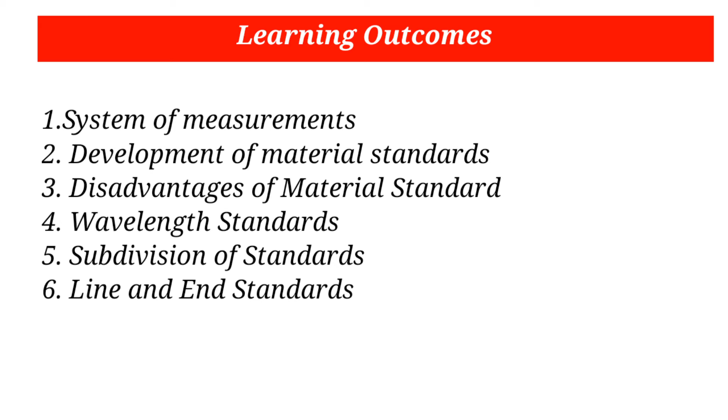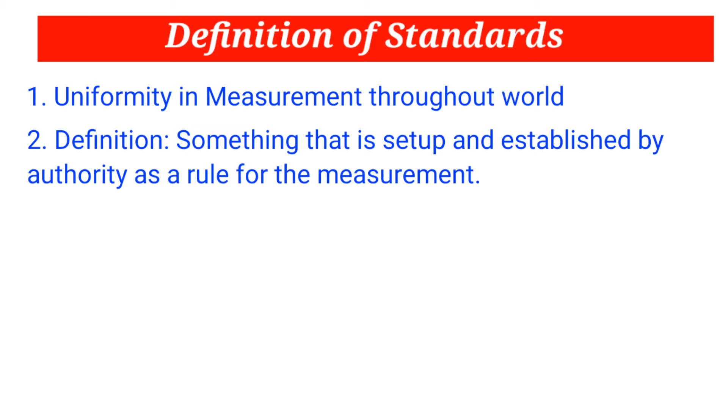In engineering metrology, for every kind of quantity to be measured, there must be a unit to express the result of measurement and a standard to permit making the measurements by maintaining the uniformity throughout the world. A standard is defined as something that is set up and established by authority as a rule for the measurement of a quantity, weight, extent, value, or quality, etc.

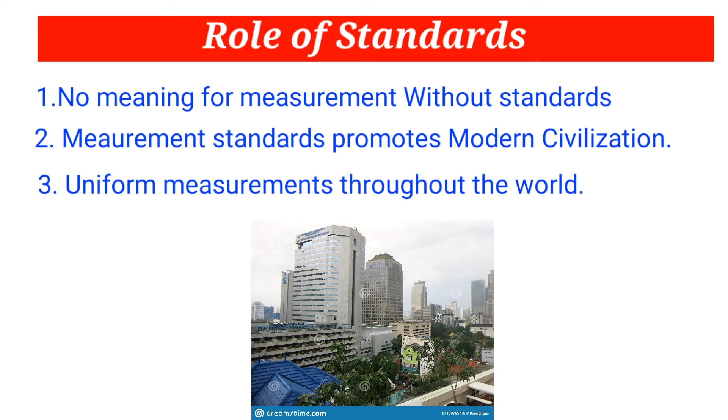Any system of measurement must be related to a known standard, otherwise, the measurement has no meaning. Industry, commerce, international trade, and in fact, modern civilization itself would be impossible without a good system of standards. The role of standards is to support the system which makes uniform measurement throughout the world and helps to maintain the interchangeability in mass production.

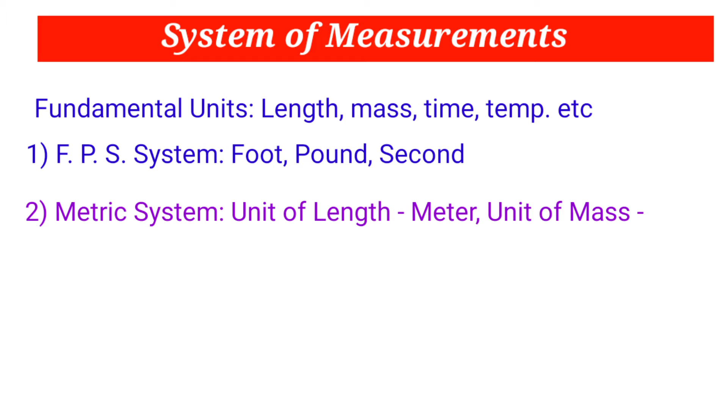A measuring system is based on a few fundamental units like length, mass, time, temperature, etc. All the physical quantities can be expressed in terms of these fundamental units. The following systems of measurement are in use in different countries. First is the FPS system. This system, being inconvenient, is steadily losing its popularity. Second is the metric system. The metric system is the predominant system in the world due to its simplicity for calculation purposes compared to the FPS system.

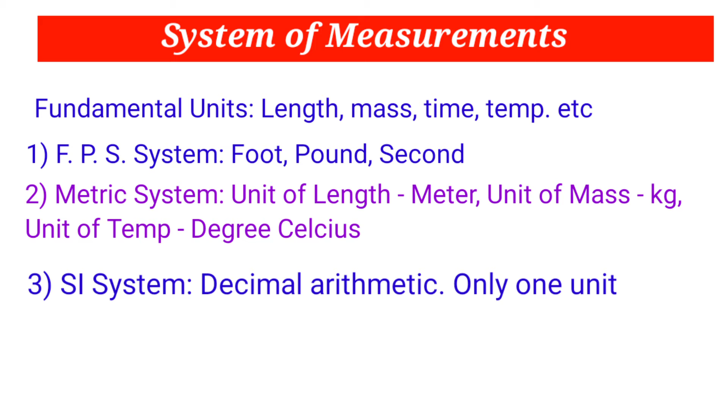It is a decimal system of weights and measures. It is based on the meter as the unit of length, the kilogram as the unit of mass, and the unit of temperature is the degree Celsius. Third is the SI system. This system is an extension and a refinement of the metric system. It is more convenient and superior to other systems. The SI system, like the traditional metric system, is based on decimal arithmetic. It provides only one basic unit for each physical quantity. It is comprehensive because its 7 basic units cover all disciplines.

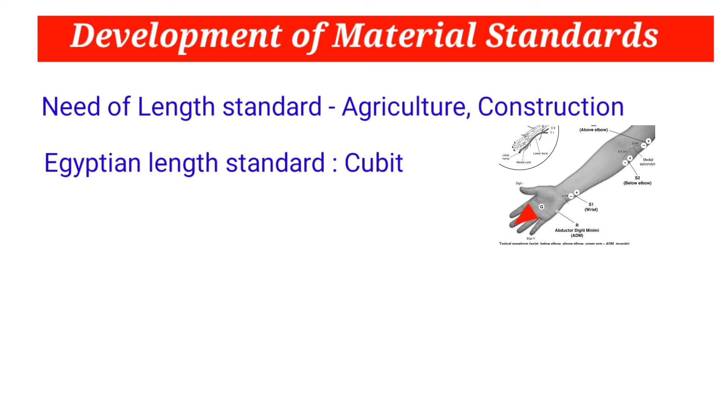The need for establishing standards of length was raised primarily for determining agricultural land areas and for erection of buildings and monuments. The earliest standards of length were established in terms of parts of the human body. The Egyptian unit was called a cubit. It was equal to the length of a forearm, that is from the elbow to the tip of the middle finger.

Rapid advancements made in engineering during the 19th century were due to improved materials available and more accurate measuring techniques developed. It was not until 1855 that the first accurate standard was made in England. It was known as the Imperial Standard Yard. This was followed by international prototype meters made in France in the year 1872. These two standards of length were made of material and hence they are called material standards, in contrast to the wavelength standard adopted as a length standard later on.

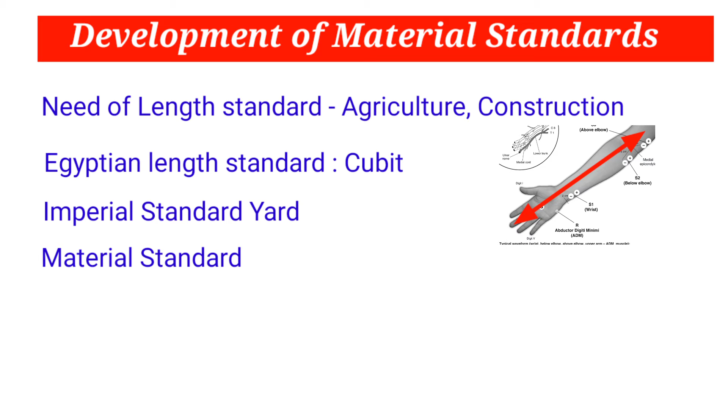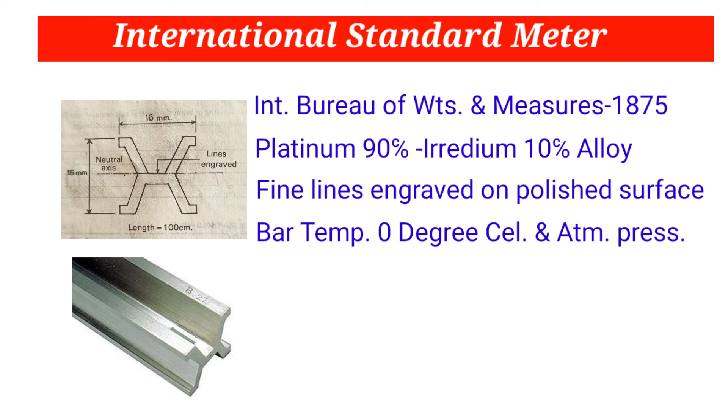This standard was established originally by the International Bureau of Weights and Measures in the year 1875. The prototype meter is made of 90% platinum and 10% iridium alloy, having a cross section as shown in the figure. The upper surface of the web is highly polished and has two fine lines engraved over it. It is inoxidizable and has the good finish required for ruling good quality lines. The bar is kept at 0 degrees Celsius and under normal atmospheric pressure. It is supported by two rollers of at least 1 centimeter diameter symmetrically situated in the same horizontal plane.

The distance between the rollers is kept 589 millimeters so as to give the minimum deflection. The web section chosen gives maximum rigidity and economy of the costly material. The distance between the center portions of two lines engraved on the polished surface of this bar of platinum iridium alloy is taken as 1 meter. According to this standard, the length of the meter is defined as the straight line distance at 0 degrees Celsius between the center portions of a pure platinum iridium alloy bar of 102 centimeter total length and having a web cross section as shown in the figure.

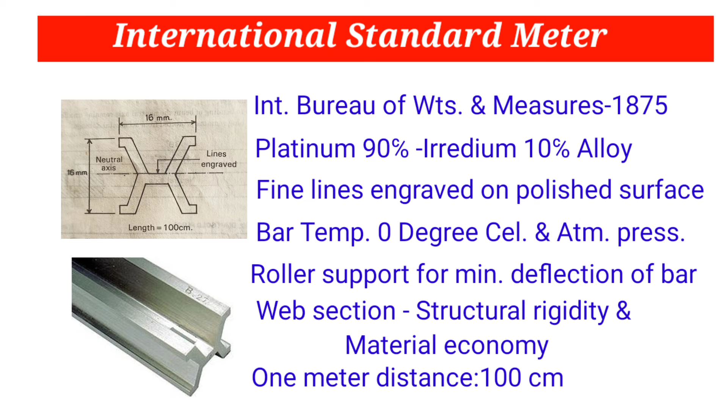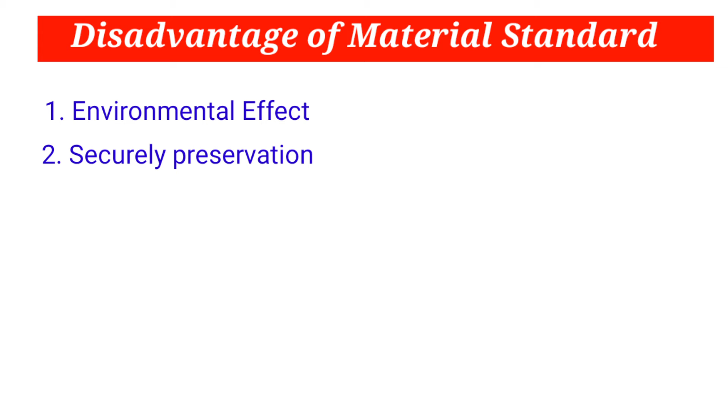The material standards are influenced by the effects of variation of environmental conditions like temperature, pressure, humidity and aging, and thus change in length. These standards are required to be preserved or stored under security to prevent their damage or destruction. Replicas of these standards were not available for use elsewhere. These are not easily reproducible. A conversion factor was to be used for changing over to metric working. Considerable difficulty is experienced while comparing and verifying the sizes of gauges.

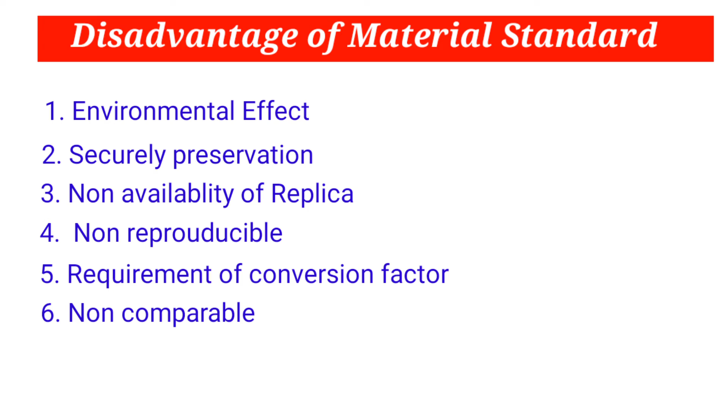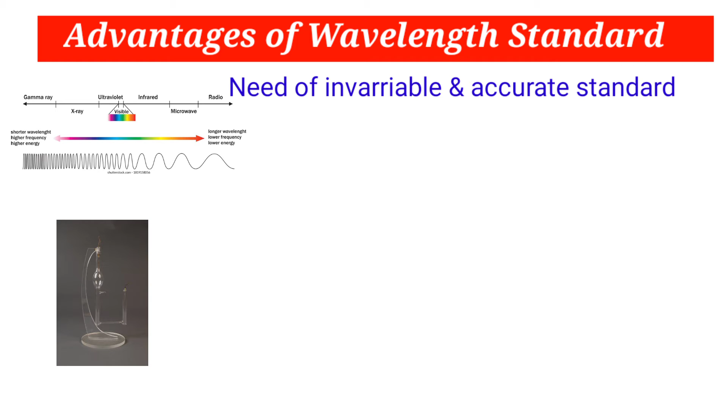The disadvantages of material standards may lead to errors of an unacceptable order of magnitude. It therefore becomes necessary to have a standard of length which will be accurate and invariable. Jacques Babinet, a French philosopher, suggested that the wavelength of monochromatic light be used as a natural and invariable unit of length. The Seventh General Conference of Weights and Measures approved in 1927 the definition of a standard of length relative to the meter in terms of the wavelength of red cadmium as an alternative to the international prototype meter.

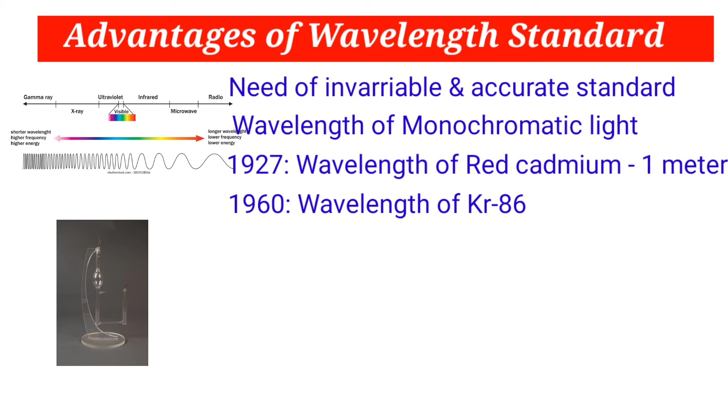Orange radiation of the isotope krypton 86 was chosen for a new definition of length in 1960 by the 11th General Conference of Weights and Measures. The committee decided to recommend that krypton 86 was the most suitable element, and that it should be used in a hot cathode discharge lamp maintained at a temperature of 63 degrees Kelvin. According to this standard, the meter was defined as equal to 1650763.73 wavelengths of the red orange radiation of krypton isotope 86 gas. The standard as now defined can be reproduced to an accuracy of about 1 part in 10 raised to 9.

The meter and yard were redefined in terms of the wavelength of orange krypton 86 radiation as: 1 meter is equal to 1,650,763.73 wavelengths, and 1 yard is equal to 0.9144 meter.

It is not a material standard and hence it is not influenced by effects of variation of environmental conditions like temperature, pressure, humidity and aging. It need not be preserved or stored under security and thus there is no fear of being destroyed as in case of a meter and yard. It is not subjected to destruction by wear and tear.

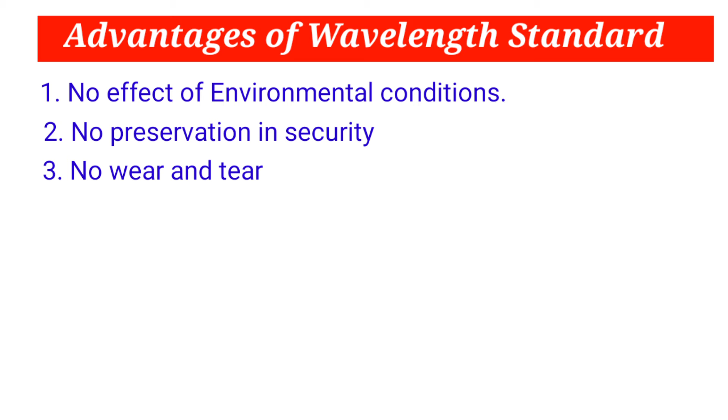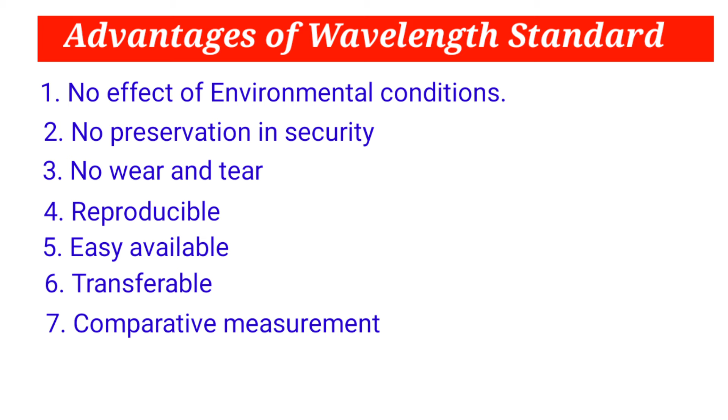It gives a unit of length which can be produced consistently at all times in all circumstances at all places. In other words, it is easily reproducible and thus identical standards are available with all. The standard is easily available to all standardizing laboratories and industries. There is no problem of transferring this standard to other standard meter and yard. It can be used for making comparative measurements of a very high accuracy.

The international standard yard and the meter cannot be used for general purpose. For practical measurement, there is a hierarchy of working standards. Thus, depending upon the importance of accuracy required for the work, the standards are subdivided into 4 grades. These are primary, secondary, tertiary, and working standards.

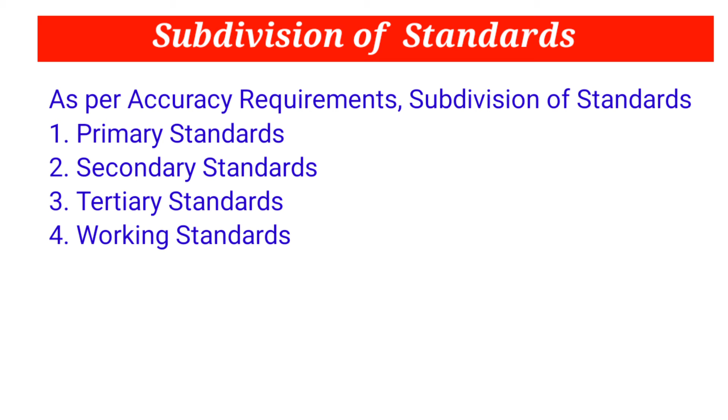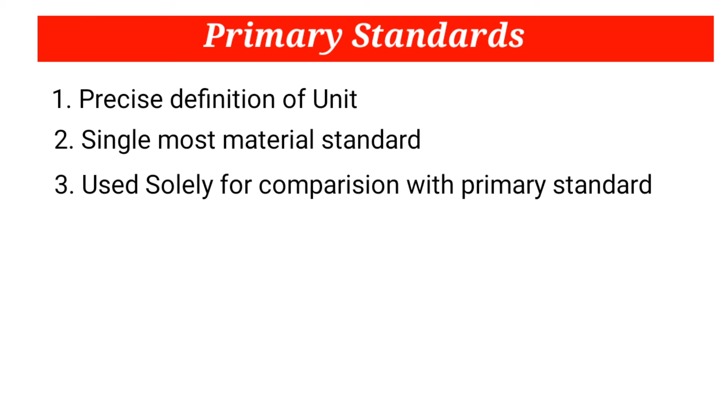For a precise definition of the unit, there shall be one and only one material standard which is to be preserved under the most careful conditions. It is called a primary standard. International yard and international meter are the examples of primary standards. Primary standard is used only at rare intervals, say after 10 to 20 years, solely for comparison with secondary standards. It has no direct application to measuring problems encountered in engineering.

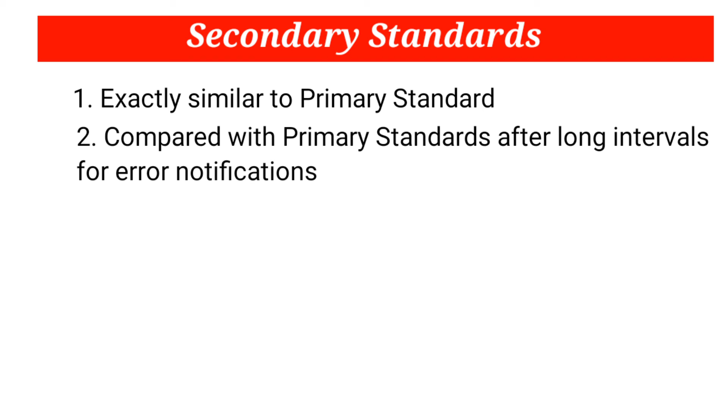Secondary standards are made as nearly as possible exactly similar to primary standards as regards design, material and length. They are compared with primary standards after long intervals and the records of deviations are noted. These standards are kept at a number of places for safe custody. They are used for occasional comparison with tertiary standards whenever required.

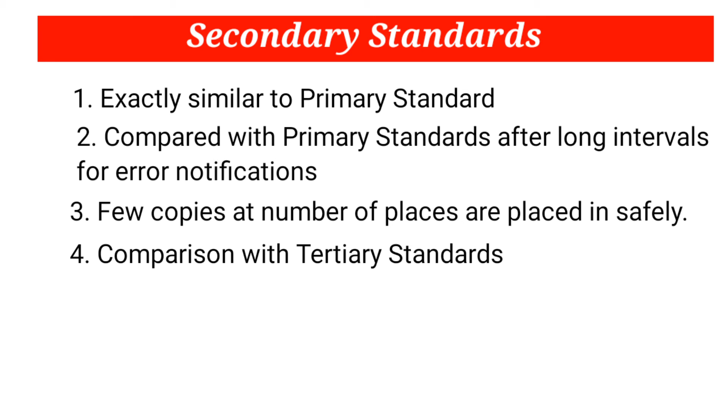Tertiary standards. The primary and secondary standards are applicable only as ultimate control. Tertiary standards are the first standards to be used for reference purposes in laboratories and workshops. They are made as a true copy of secondary standards. They are used for comparison at intervals with working standards.

Working standards. Working standards are used more frequently in laboratories and workshops. They are usually made of a low grade of material as compared with primary, secondary, and tertiary standards for the sake of economy.

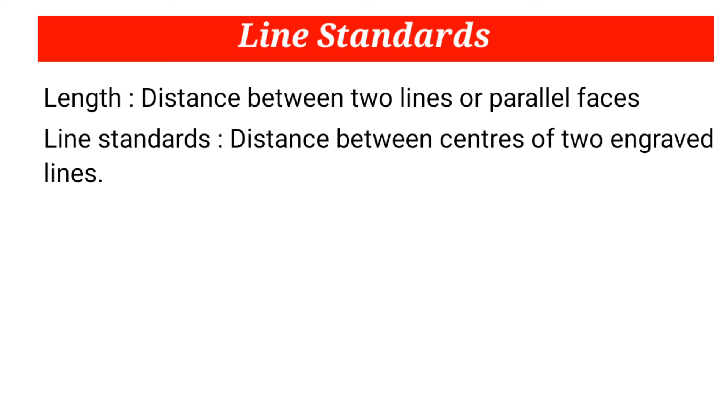A length may be measured as the distance between two lines or as the distance between two parallel faces. So the instruments for direct measurement of linear dimensions fall into two categories: one is line standards, two is end standards. Line standards. When the length is measured as the distance between centers of two engraved lines, it is called a line standard. Both material standards, yard and meter, are line standards. The most common example of a line measurement is the rule with divisions shown as lines marked on it.

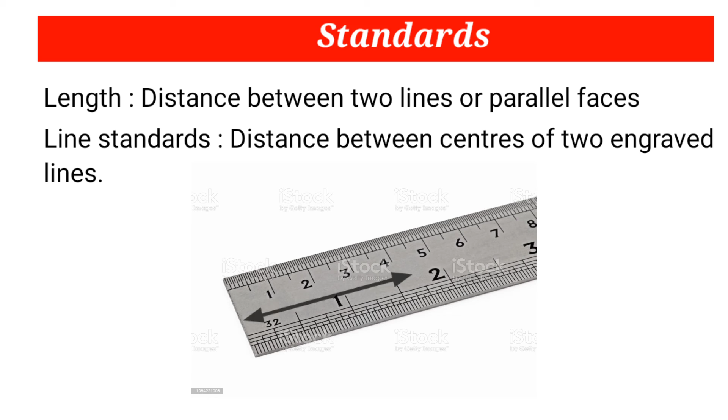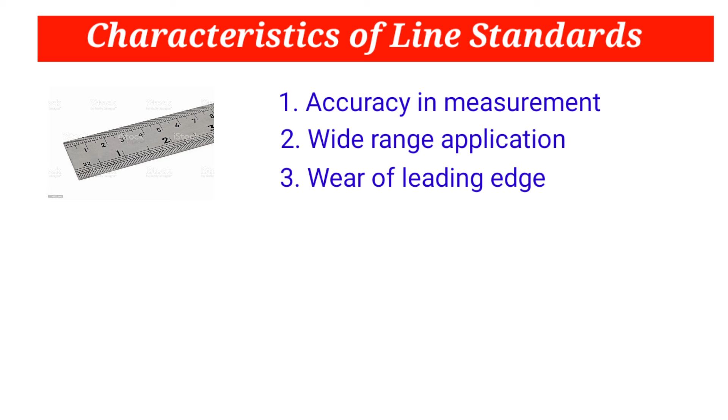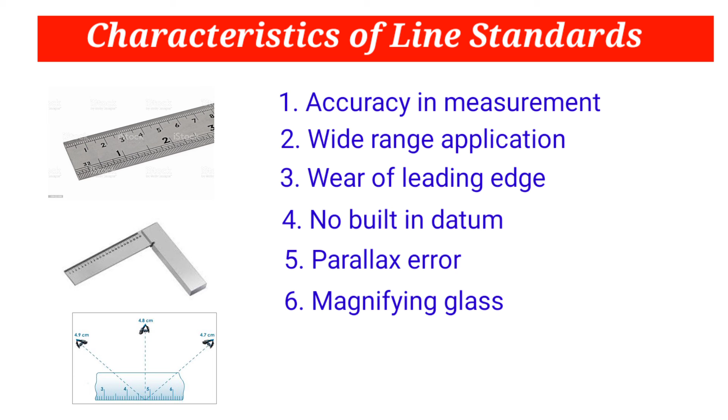The scales can be accurately engraved, but the engraved lines themselves possess thickness and it is not possible to take measurements with high accuracy. A scale is quick and easy to use over a wide range. The scale markings are not subjected to wear. However, the leading ends are subjected to wear and this may lead to undersize measurement. A scale does not possess a built-in datum. Therefore, it is not possible to align the scale with the axis of measurement. Scales are subjected to parallax errors. Also, the assistance of a magnifying glass or a microscope is required if sufficient accuracy is to be achieved.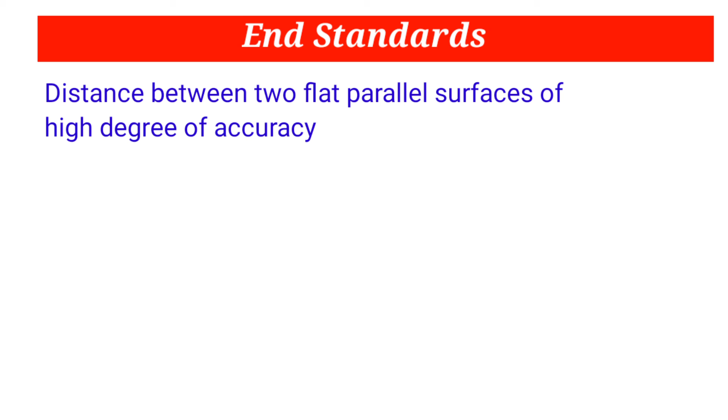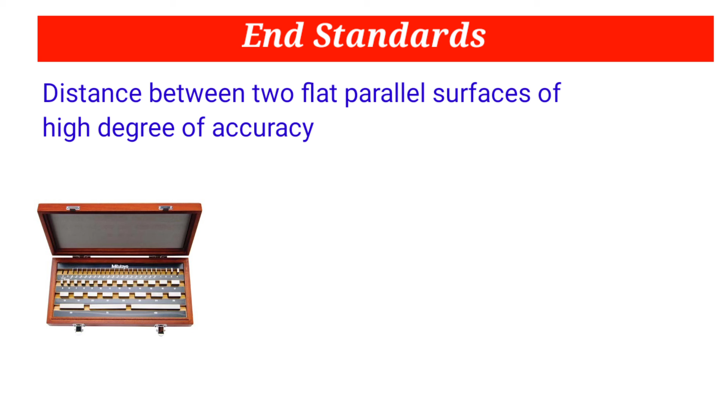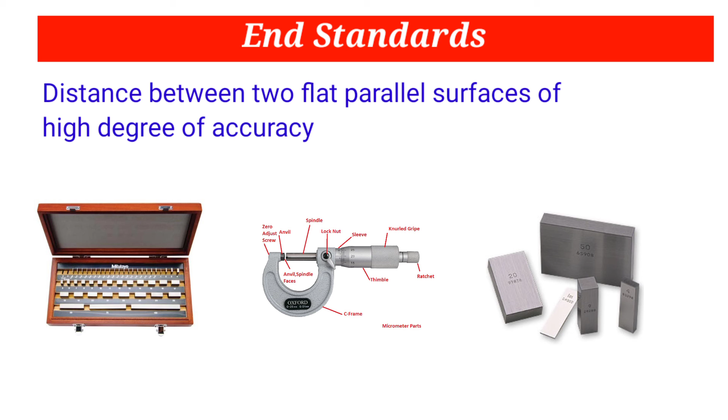When length is expressed as a distance between two flat parallel faces, it is known as an end standard. Examples: measurement by slip gauges, end bars, ends of micrometer anvils, vernier caliper, etc. The end faces are hardened, lapped flat, and parallel to a very high degree of accuracy. These standards are highly accurate and used for measurement of close tolerances in precision engineering as well as in standard laboratories, tool rooms, and inspection departments.

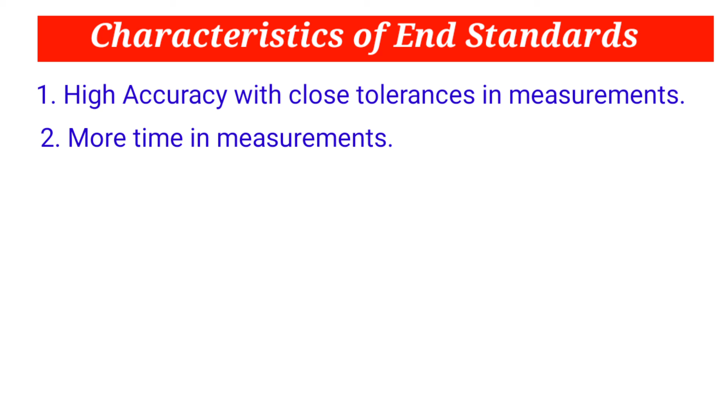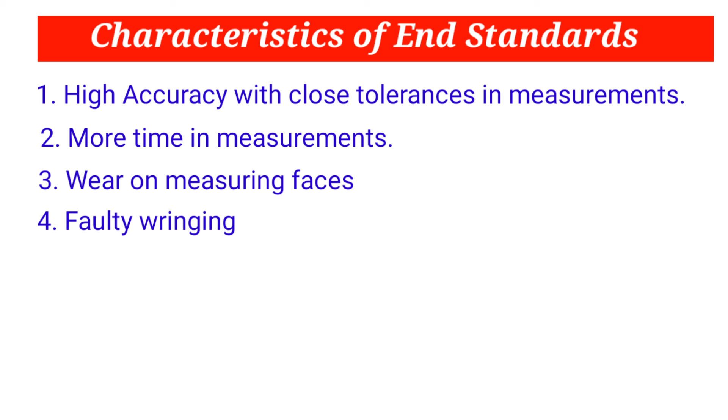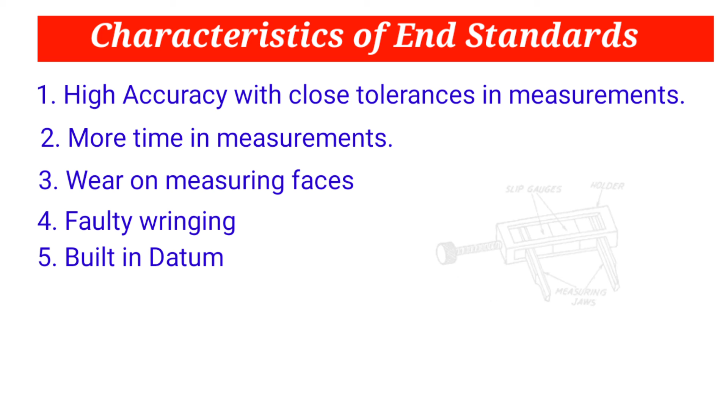They require more time for measurement and measure only one dimension at a time. They are subjected to wear on their measuring faces. A group of slips can be wrung together to build up a given size. Faulty wringing and careless use may lead to inaccurate results. End standards have a built-in datum since their measuring faces are flat and parallel and can be positively located on datum surfaces. They are not subjected to parallax effect as their use depends on feel.

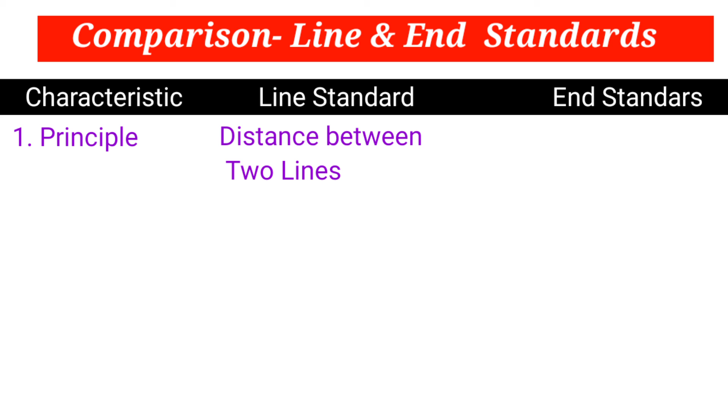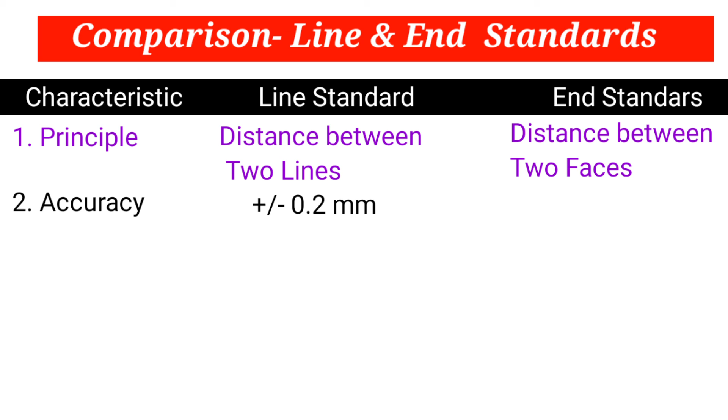In principle, in line standards length is expressed as the distance between two lines. In end standards, the length is expressed as the distance between two flat parallel faces. Accuracy of a line standard is limited to plus minus 0.2 millimeter for high accuracy. Scales have to be used in conjunction with a magnifying glass or a microscope. Accuracy in case of end standards, which are highly accurate for measurement of close tolerances up to plus minus 1 micron.

Effect of wear in line standards: scale markings are not subject to wear. However, significant wear may occur on leading ends. Thus, it may be difficult to assume zero of a scale as a datum. Effect of wear in end standards: these are subjected to wear on their measuring surfaces. Manufacture and cost. Line standards are simple to manufacture, having a low cost. In end standards, the manufacturing process is complex and also the cost is high.

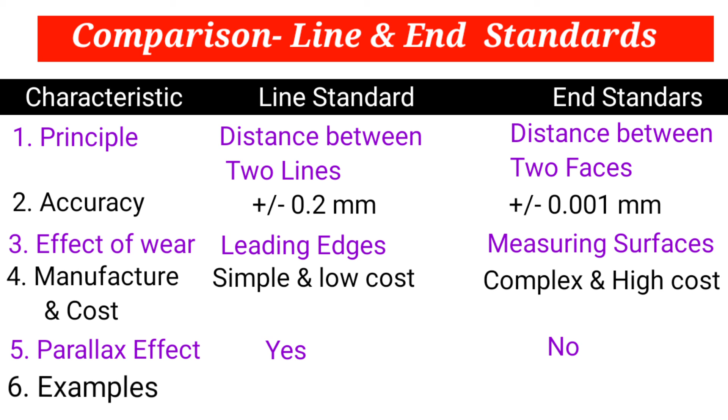Parallax effect. Line standards are subjected to parallax error. End standards are not subjected to parallax error. Examples. Scale is an example of line standards, whereas for end standards, slip gauges, end bars, vernier calipers, and micrometers are the examples.